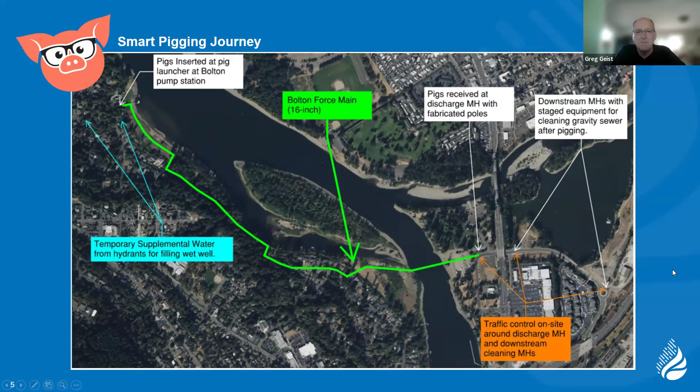Next slide, I think. So Greg, how long did it take for that pig to get from one end to the other? That's a great question. I don't know. Jeff, do you know? It's about 5 minutes is how long it took to go from one end to the other on each pig run.

One thing I'll note, and Greg might touch on it, but I haven't seen these slides, the reason we were doing this was, this is a line that we have had a couple of failures in over the last 7 years. And so in addition to cleaning, we sent a specialized pig down, which is a smart pig. And Greg, you might have a picture of that.

Yeah, I'll get to that. Yep, go for it. All right. Stealing your thunder. I'll step back. That's fine, go for it.

And what we found is that after we installed those pumps, we weren't getting the performance out of the pump station that we expected based on the analysis of what the pump should be able to pump. And so that was part of the reason why we went ahead and did the pigging. And it was very successful. We were nervous about it.

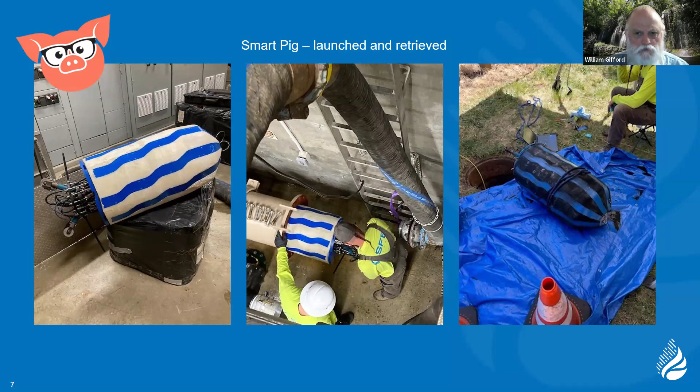Yeah. William, you had your hand up, I saw. Yeah, thank you. So it goes in white with blue stripes and comes out black and blue? Yep. In the pipe? It's scouring the sidewalls of the pipe, and so you can imagine after 40 years, even after a number of pigs have gone through it, it's not clean. It's not a steam clean. It's more removing debris and other things that might have settled.

Some of that's caused by velocities in the pipe and low flow during the summer. When they're slower, you get buildup or deposition in the pipe. So even after a number of pigs had gone through, that's what it comes out looking like. How many pigs went through?

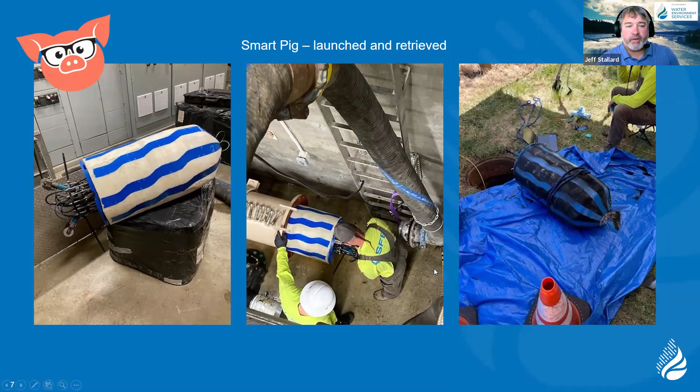There was a series of 8 pigs that went through. As Greg mentioned, they're smaller and softer to start with, so you want to make sure that when they come out the other end, they're not torn up and beat up or getting hung up. Then you gradually make them stiffer and bigger to scour better. So it's a real systematic approach. That's cool technology.

Why is it called a pig?

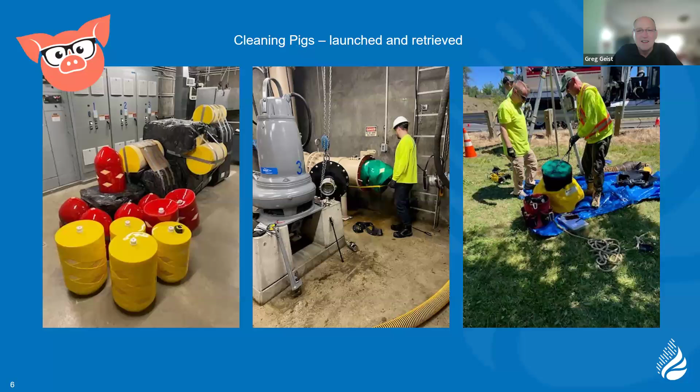Our engineering staff did some research, and apparently when this technology was first developed, the pigs were straw balls wrapped in barbed wire. When they went through the pipe, the scraping of the barbed wire along the metal sounded like the squeal of a pig. Hence the name pig.

That's funny, yeah, I thought that was great. Looks like I have a question, Greg or Jeff.

Just not to get too graphic, but I'm curious how dirty those pipes were. Can you describe the volume of stuff that came out the other end, or describe how much actually got cleaned up from the pipe?

TMI, unfortunately I wasn't there to witness it. We had a Vactor truck there to suck it up, but there was debris, though it was not as odorous as anticipated. We were concerned because we were capturing these pigs right outside Clackamas Park, which gave us some worries about odors, especially in the summer months when it's heavily used. We did not, that I'm aware of, receive any complaints on odors, but it definitely comes out as a black sludgy material, though it wasn't as odorous as anticipated.

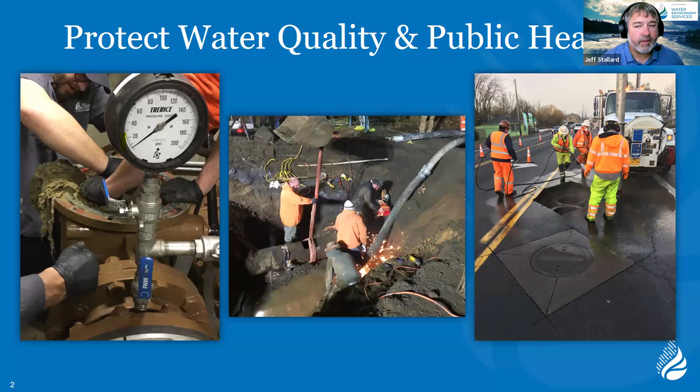But before I dive into those details, I always like to remind folks why WES is important. I love the outdoors, and I like to protect our outdoor spaces, and that's kind of why I got into this business. I just want to acknowledge the efforts of the people on this committee who give their time to making sure that we're doing the right thing and protecting the environment, our water quality, and public health. Thank you for being a part of our committee. Next slide.

So we'll give a little background on the capital improvement plan development, project updates, some next steps, and some questions. This is kind of the outline I have. Next slide.

So while we're here tonight to discuss and give an update on the current CIP that we have adopted, I want to take a moment and recognize that this is just one of our four critical strategies that are critical to supporting our mission and vision: the strategic plan, our fiscal year budget, our long-range financial plan, and our capital plan, which is what we're here to talk about tonight.

As the capital manager, of course, I like to think of the CIP as the most important document we put together, but that's not the case - the reality is much different. I think all of these strategies are equally important and are really the core documents that inform our decision making and set the platform for us to make data-driven decisions and not emotional decisions. We try to really use data and facts to inform our decisions on timing, how we can pay for things, and what is our strategy and our core values. So all of these are intertwined together.

So just want to point out that while we're here to talk about the CIP, we have these other documents that are influencing this plan.

Next slide. And so while I mentioned these core strategies that are impacting our plan, we also have the plans that make up the capital plan, which include the Hoodland Master Plan, which really looked at the collection system and the plant there from a condition-related standpoint; our sanitary system master plan, which was completed in 2019; the boring facilities plan; the Willamette facilities plan; and our storm system master plan, which was the most recent plan.

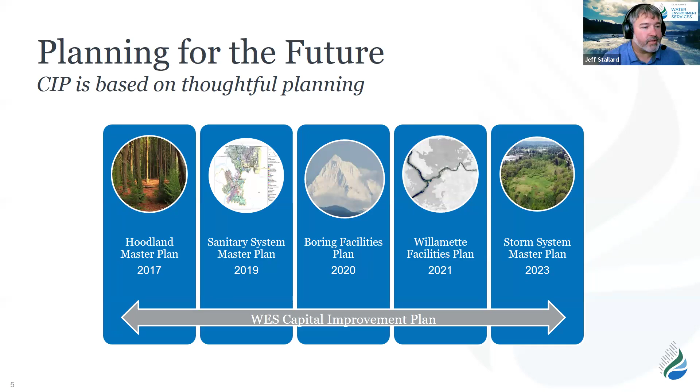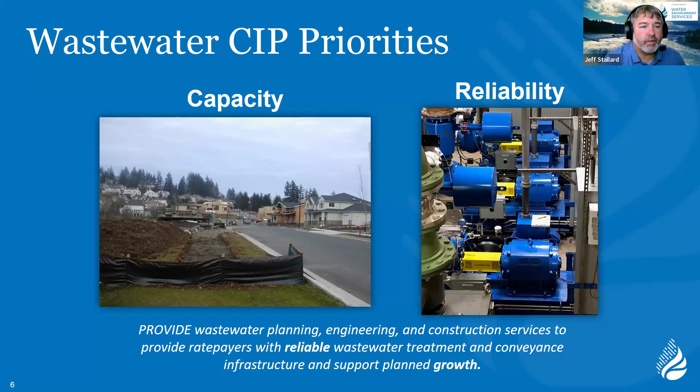Next slide. So as we develop our CIP, which is based on all the planning documents, there's really two main categories that drive a majority of the projects in our plans. The first is ensuring the capacity of the system, that's treatment and collection, making sure that capacity is adequate to support the anticipated growth of our community, be it residential, commercial, industrial. We want to make sure that we can accommodate that growth. The second is to ensure that the infrastructure we own continues to be available to be operated by our amazing O&M staff. Pumps and other things have useful lives associated with them, so we want to make sure that we maintain those systems and replace them when they're at the end of their useful life. So two main categories we look at are capacity and reliability.

Next slide. So here's kind of when we look at those, our projects in our CIP, just on a percentage basis, we have, as I mentioned, the reliability and the capacity. And as you'll see here, our reliability component is a much larger percentage. It's almost a 60-40 split, with a sliver of regulatory in there.

I want to take a moment and highlight this regulatory component. As you can see, we have a pretty small amount that we allocate or anticipate for regulatory. But if we get a different permit limit than we're anticipating—and all of our facility planning, as Greg mentioned, is really focused on both Kellogg and Tri-City—there are some unknowns in there. If a limit comes down, that could change our planning documents significantly.

So we are in the process of working with DEQ on our Willamette facility plan and getting their buy-off on our path forward. I just want to let this group know that that's not finalized or set in stone, and those conversations are ongoing even to this day. We will obviously get DEQ concurrence before we'd kick a project off, to make sure we're doing what we're allowed to do. But there is a piece where we're not seeing or forecasting significant regulatory changes at this time coming down the pipeline in the Willamette River Basin.

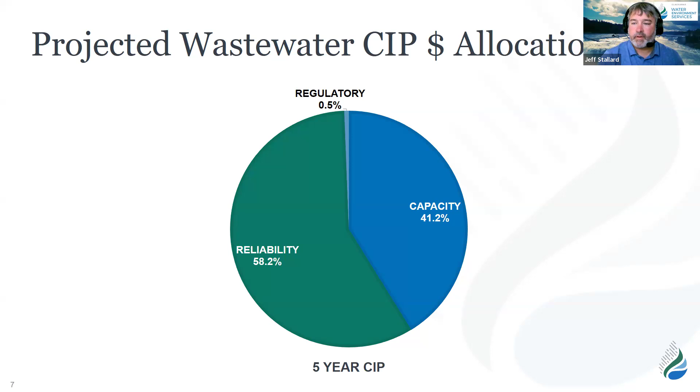Next slide. So how are we doing delivering the plan? If you recall, one thing I want to note was a big change this year: historically we had developed a budget and then created a CIP after that. Last year, we reversed that order—we built our CIP, which then fed into our budget, which was so much nicer, I'll say it that way. It was a lot easier to build the budget when you already know what you have to build.

As you can see, we've been a very busy group. Our capital plan had identified 17 projects, and we're currently working on all 17 of them. We had a budget of $49.7 million this year, and I'm anticipating spending roughly $41 million of that, or about 82% of budget versus actual. I want to step back and comment on how one project can really significantly swing that number, and how the timing of construction can have a really big impact on that.

The project I'll highlight is the Tri-City Outfall project. It's the biggest dollar project we have in our plan at $60 million of construction dollars. Our Clack-a-Mole tunnel machine was delayed by about a month getting to our site. Our monthly spend this summer, when we'll be doing open cut construction and tunneling, will be roughly $8 to $10 million a month on the outfall, for about 4 months. So you can see a one-month delay on that project could have a really significant impact on our budget versus actuals—and we are delayed a month on that project. I think we might have gotten even closer to our target had things gone as we thought they might, but things are out of our control. I just want to highlight that one project getting delayed can have a big impact on that.

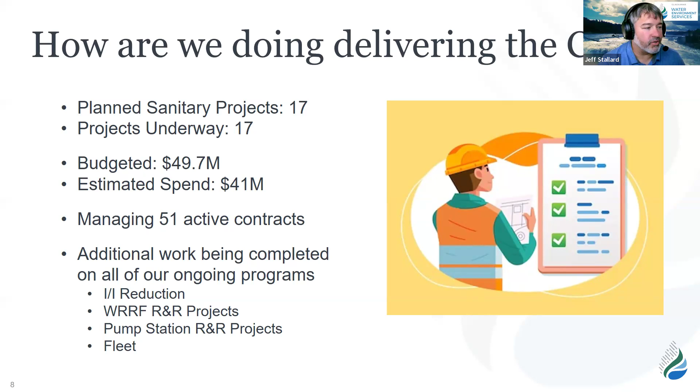We're managing 51 contracts, which are contracts in all phases of project delivery, be it a consulting contract, a contract with a contractor, or a contract with a consultant doing planning work for us. That's a significant workload for our work group. I'll note that while the focus of the CIP is the major projects, there are many annual programs that take a lot of time and energy to manage, like the I&I reduction program, the renewal and replacement program, and our fleet. So in addition to these capital projects, we have all these smaller ones as well.

Staffing updates. As Greg mentioned before, we are full. We have a full engineering staff now, and our last position was filled July 1st. Josh Miner came on board, as Greg mentioned. I want to thank this group for supporting the recommendation to add 2 new engineering staff to our group. That was approved by the board, and we were able to get it. He couldn't start until July 1st, but he would have been on board before the end of the fiscal year if we could have had him earlier. That brings our total staff in the capital group to 8 engineers and 1 construction coordinator.

As Greg mentioned, our newest hire, Josh, is really there to help us on the construction side of things. As we started to dig into how many projects we could do at any one time, there becomes a limit to what you can tear up in your system at once. We're paying consultants a lot of money to do inspection work because we don't have the staffing to have folks out there full time. So we're having that engineer focus on being a construction manager for us, which will allow us to not have contracts with consultants, a much more expensive way to deliver that. It's a goal of ours to build that in-house resource, and then you retain that knowledge in-house, which is beneficial for the long term of our organization.

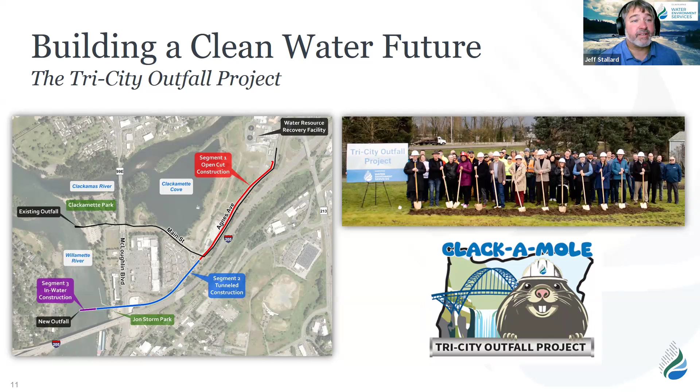The Tri-City Influent Pump Station was original to the plant, 1985 construction. This pump station receives all the raw wastewater from the collection system and lifts the flow up to the treatment processes, where it is allowed to flow by gravity all the way through our treatment systems and out to the river.

The facility plan identified both a need for condition upgrades as well as an expansion required for the pumping capacity to accommodate the anticipated growth in the service area. This station needs to handle all ranges of flows. Flows that we receive overnight in dry weather are much different than when a storm comes through, so it's got to accommodate a large range of flow.

At this point, we're underway. We're at conceptual design, and I'll note that when we talk about the planning, the current firm capacity of this station is 50.8 million gallons a day.

For those of you not familiar with what firm capacity means, basically when we rate a pump station, we rate it based on having the largest pump out of service. We assume we're going to lose the largest pump in the worst of times, and we design our system to accommodate that.

So we currently have a firm capacity of 50.8 million gallons, and the upgraded station will have a firm capacity of 72.3 — a pretty big increase. I will note that the total capacity of the existing system is 68.4.

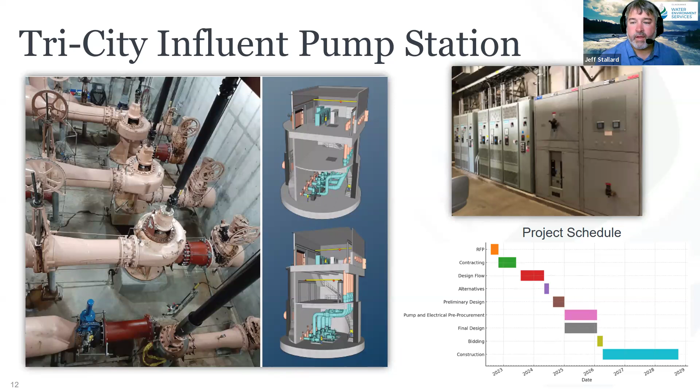Tri-City Primary Clarifier Project. We've got some new folks, so I'll take a moment to outline the purpose of the primary clarifier. This goes from the IPS, through our headworks, which is physical screening, and then into our primary clarifiers. It's the final physical treatment process that removes solids before we go into biological treatment at the plant.

Wastewater enters the clarifier tanks, and floatable solids — fats, oils, greases, or scum — are removed from the surface. You can see the chains that go across; they scrape the bottom one direction and the top the other direction. We bring our scum down one way and pull our settled solids down the other. Settleable solids are the sludge, so we remove scum and sludge.

Effluent destined for biological treatment leaves the clarifier over a weir, and the expected range for percent removal in the primary clarifier is roughly 90 to 95% of the settleable solids. So we really slow the flow down and give it time to settle out.

All of the original equipment has been in service since 1986 when the plant was brought online. This project consists of replacing all the mechanical equipment and repairing the concrete surfaces, which is what you're seeing here. On the left, where those guys are spreading concrete, you see it's really aggregate kind of under their knees.

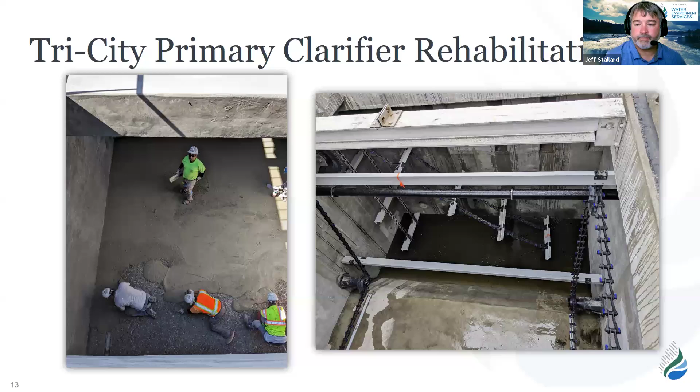But this could allow us to delay the building of our future digester, which is planned in 2040 now. So it's a ways off, but this could allow us to delay that even longer because it really gave us extra capacity in our digesters. Next slide.

Kellogg Creek Influent Pump Station. We completed this project and all the pumps are in operation during this past winter. I want to highlight the type of pumps. These gray pumps, most pictures of the pumps in our stations, you're going to see these gray pumps. Greg, I think, commented on it at Bolton. They had these new gray pumps.

We, as an organization, about 4 years ago, standardized on Flygt N impeller pumps. I don't want to call them the Cadillac because they're not super expensive or anything like that, but from a performance perspective, they perform amazingly in raw sewage situations. We put one in at our Willamette pump station, which is a station that was constantly having ragging issues, and that one pump didn't have any ragging issues while the other ones regularly still had ragging issues.

And so we standardize on these pumps, and these are the type of pumps we're putting in at all of our stations. That's a big deal because it limits the number of spare parts we need to have on hand. A lot of those are interchangeable, and also training our O&M staff for operating and maintaining these pumps becomes simplified when you're only talking about one style of pump. So that's a big deal, but that station's up and running and that project's complete.

What are those pumps called? Flygt, F-L-Y-G-T, and they're the N impeller. It's a specific impeller type that's designed to pass big solids. I think depending on the size of the pump, some of those pumps can pass 6-inch solids without an issue.

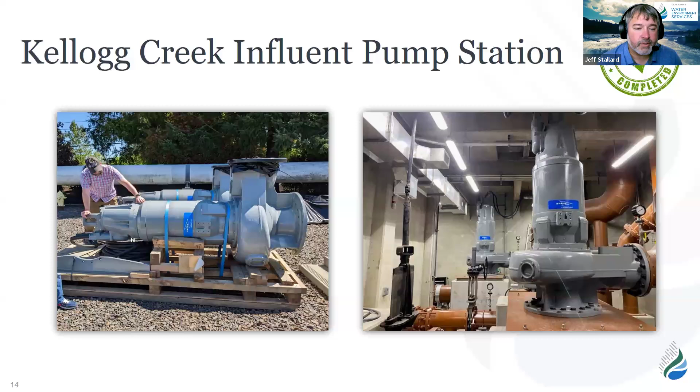Thank you. And they kind of have a cutting head on them, William. So as you get these rags that develop in our system, and we continue to tell people don't flush wipes, things aren't flushable, they continue to flush them anyway. And these pumps do an amazing job of getting those conveyed through our system. Next slide.

Our Kellogg Creek Aeration Basin Improvements Project. As you might recall from last year, the aeration basins really are the heartbeat of the liquids treatment process at the facility. Air is supplied in these basins to the bugs that we're using to remove our organic pollutants. The control of oxygen in these basins is critical. Get just the right amount of DO, you grow just the right amount of the right type of bugs you want. If you're off, you start to grow different bugs that can impact your sludge's consistency and settleability.

The main focus on this project was to overhaul the system to increase control. Our blowers are the most expensive piece of equipment we operate, and so if we can dial in and optimize the operation of those pieces of equipment, we can save money. This project was completed this fiscal year and is in operation. And as I mentioned, we're anticipating saving around 134,000 kilowatt hours a year on just these control optimization and piping upgrades.

And we were able to get an Energy Trust incentive for this work due to the energy savings for about $50,000. So Energy Trust subsidized our project $50,000 because we're able to save power, and we're taking that initiative. So a very successful project, and we continue to refine and optimize the controls for these as we work through the different operating seasons. But it's been a success so far. Next project.

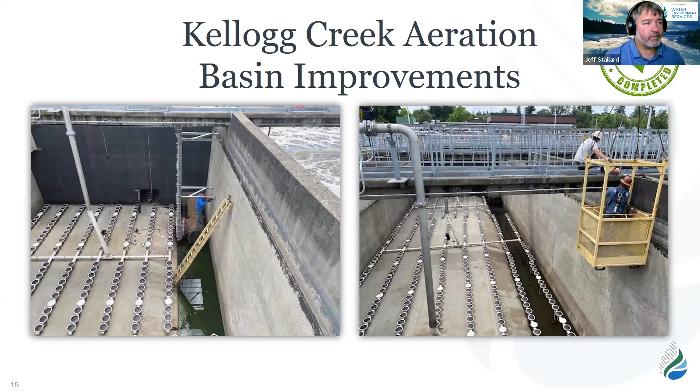Kellogg Creek Secondary Clarifier Rehab. This project was completed over 2 summer seasons. We did two clarifiers at Kellogg. We did one summer and the second the next summer. This project consisted of new drives, so it's the new motor drive to drive the mechanism. We re-leveled the mechanisms and the weirs associated.

We, as you can see, tore off the slab on the bottom, which is basically a surface slab, so it gives your mechanism a nice smooth surface to ride on. So you match those two up, so you get really good scraping action on the bottom, essentially. We repaired some concrete in other areas of the basins as well. And we put a new coating on the existing mechanism.

So we shouldn't have to revisit these for another 20 plus years. It was a big success to do over 2 years. And we've actually noticed a little bit with the leveling of the weirs, we're able to more confidently pass higher flows through the Kellogg plant in a more comfortable manner. Ops is less stressed when we get up to higher flows because these basins are really performing a lot better than they were before.

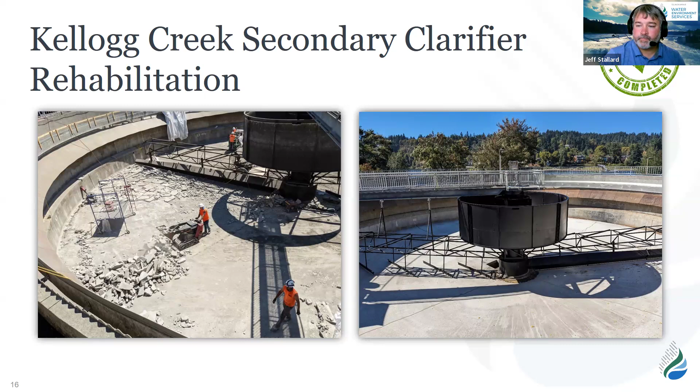It's full of windows, and I guess everybody likes to work in a place that's comfortable and feels happy and warm and inviting. And so I think this will make our facilities more appealing for folks to want to be there and also want to work there. The locker room overhaul, a lot of improvements. I'll give an example. We have a converted janitorial closet currently as a shower in our facilities just because they just haven't been updated in time. So it'll be a really nice facility when we're done.

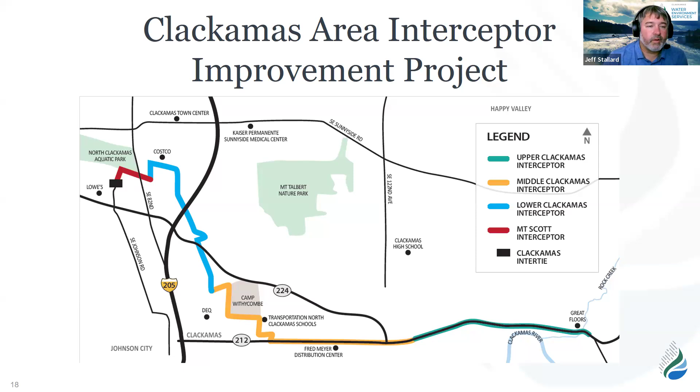Next slide. This is a new project, and if you recall, last year we moved this project up a year. We were not originally going to get started on it until fiscal year 24-25. Instead, we started during fiscal year 23-24. We are out there now getting our planning and our field work done. We're working on geotechnical explorations along the alignments.

As you can see, we've spent spring, summer. By this winter, we'll have a conceptual design to go through, and we'll be transitioning into 60%, property acquisition, permitting, and then onto construction, with construction to be wrapped up in 2027.

This extension has really two features. One is the east extension of the Rock Creek Interceptor along Troge Road. That'll go out to Foster, and the other is the north extension that goes all the way up to the Clackamas County, Multnomah County border, essentially. So it's a relatively large project. There's rock and some very deep sewers there. It's not a perfectly flat piece of property along the alignment.

This initial conceptual phase we're in right now will take the planning level routing that was completed as part of the initial project that built the first phase of Rock Creek. We'll make sure to refine that, looking at property acquisition. Do we have people that are willing and wanting to give us easements across their land? Those are the types of things that we'll be evaluating as we finalize that specific alignment. The corridor is going to stay. It's just a matter of which particular properties would be going through as part of this project.

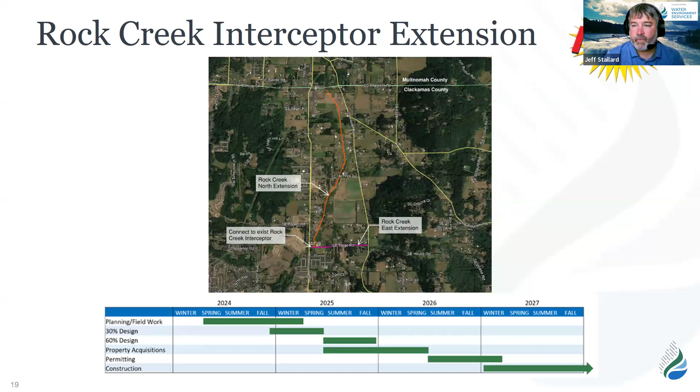The IT2 force main I mentioned before, the Clackamas Interceptor, brings flow down to the station. If it doesn't come to the station, it goes by gravity onto Kellogg. So this station is really our opportunity to pull flows out of the interceptor to send them to IT2.

We are currently out to bid on the force main piece, those segments A through F. That's the pipeline pieces. We're expecting bids to come back next Thursday, so I'll have a real good feel on costs for this portion of the project. We are also working at 90% design on the pump station improvements.

On these pump station and force main projects, it's really two different types of construction: one's linear along streets, and one's really mechanical, process mechanical, at a pump station. We traditionally separate those into two different contracts for two different contractors, and we manage them that way. There's a lot of interplay between those two.

The big part of this project that isn't really infrastructure related is the controls. As you can imagine, the controls are very complex, and we're getting ready to make them more complex by adding this 30-inch force main. Now we'll have a 20 we can send flow through, a 30 we can send flow through, and we can let it go to Kellogg. There's a delay in the controls on what you let pass the pump station, so we've built a dynamic controls model we can play with to dial in exactly where our flows are going to go and build in that delay time to understand how it's going to impact our facilities.

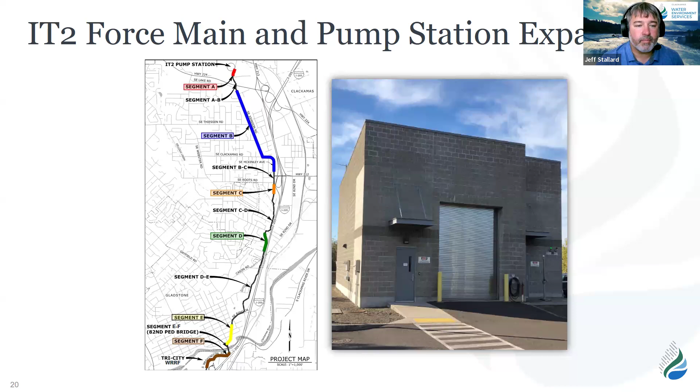The Willamette Interceptor project is ongoing, and it consists of essentially 3 separate projects: the I-205 bridge crossing, being constructed by the ODOT contractor; the new Willamette pump station, which will be a brand new pump station, not an overhaul of the existing one, which we'll be decommissioning; and the new Willamette force main. As with pump stations and force mains generally, we build those with two separate contractors because they're really two different skills. We just completed conceptual design of the pump station and force main this year, and we're moving towards 30% on that design.

I do want to note that even though we're not anticipating construction to begin on this project until 2026, we've had a couple of meetings now with the West Linn Engineering Group to talk about this project. We're very aware that construction along Willamette Falls Drive is not going to be fun for anybody. It's going to be very challenging to build and very impactful to the community. This will especially be true pending the outcome of tolling, which everybody's familiar with in our area, but ODOT anticipated that traffic along the Willamette Falls corridor could potentially double if tolling's instituted, which would kind of double down the impacts of our construction. So we've started early communications with West Linn, as we try to do on all our projects, to get out early and make sure everybody's informed. We haven't done a lot of public outreach to the general public yet, but we have been in conversations with the technical staff at West Linn about this project coming, and working with them on the impacts in those areas.

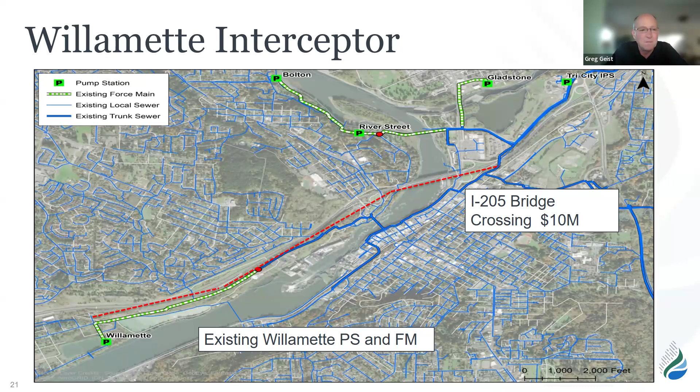Next slide. We're getting down to the end here.

Multi-pump stations project. This was really a program we've been working on for a number of years. As you can see from the list, when we embarked on upgrading our pump stations, it started off as a couple, and we realized with the sanitary sewer master plan, many more upgrades were required than what we originally planned for. So we decided to go ahead and have one consultant and one approach to upgrade all of them for consistency.

That helps our operations staff see controls being all the same, equipment being very similar, and layouts and those types of things. We are under construction this summer at our Gladstone facility. We've completed 4 of our pump stations, and we're out to bid on the ones up at the mountain and some small improvements at Sieben Lane, Carver, and Mitchell Creek. We expect to get bids back this week.

Today, actually, I didn't hear the results on the 82nd Drive pump station, and the next package isn't advertised yet, but it's over to procurement to be advertised in the near future. This work will all be done next summer - a majority of it just on lead times - but when we're done, we will have touched a high percentage of our pump stations.

As I mentioned previously, we standardize on Flygt pumps - those are the types of pumps being installed at all of these stations, you can see the picture there. Again, this is really to give us consistent controls and address deficiencies and aging infrastructure. Not a lot of capacity increases for these smaller pump stations, some minimal capacity increases, but a lot of condition improvements.

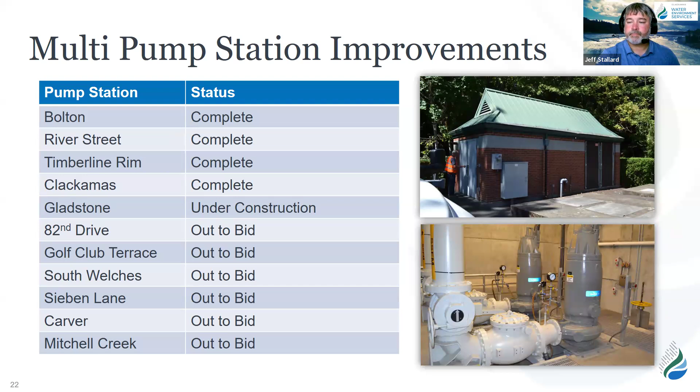Our shared collection system, the inflow and infiltration part of it - just highlighting our regional approach. Fiscal year to date, we've spent about $550,000 to our member communities on I&I related projects in those 19 basins identified in our sanitary sewer master plan. We have 3 active projects being done right now, and 11 total approved projects, with the anticipation this is about an $8 million investment we're going to make in fiscal year 24-25. So this is no small investment we're making in our collection system and I&I, across not only our facilities that WES owns and operates, but our member communities as well.

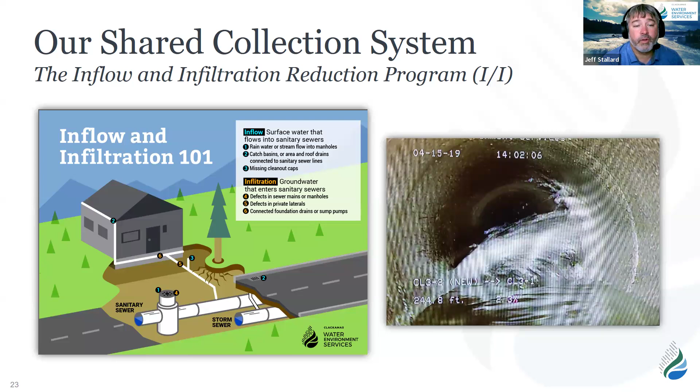Next slide, I'll give you a real world example of the things we find and the things we do. Our collection system master plan used data from 2015. Our most recent analysis of I&I rates used data collected between 2017 and 2022. We really embarked on expanding our flow metering approach and collecting good data.

What we found is we are making progress in our Mount Talbert Basin. I'll highlight one of the projects we did and found during our analysis. We did smoke testing and found a detention basin that was smoking - really weird. When we went and looked, this is a Kaiser facility that was built with an abandoned lateral that was never plugged. Literally, their entire parking area drained to this stormwater facility, which was an infiltration basin. It wasn't infiltrating - it was going right into our abandoned service lateral and coming right into our collection system.

And so those are the types of things that we find when we're out doing smoke testing. Also, to paint the picture, you can imagine how big of an impact this had to our I&I in this basin. Just pulling that one line off has a pretty big impact. From a cost perspective, our field op staff went out, uncovered the abandoned lateral and plugged it. Not all I&I projects are expensive or take a lot of time. This was a really quick fix, and it's shown to have a pretty immediate impact on the flow we have coming from this basin. So we hate to find them, but we also like to find them because it's a really quick, easy solution.

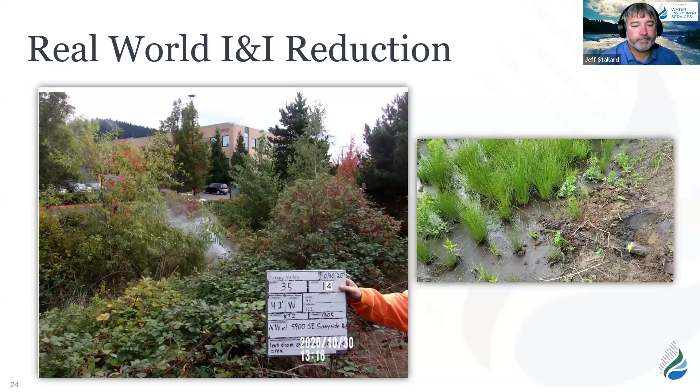Next slide. So our renewal projects - just want to highlight that we use condition assessment information to prioritize and plan our smaller projects. This is small equipment replacement that isn't included in a larger project. During this year, we replaced a number of flow meters throughout our plant, and we're working as part of this program to rebuild the cogen engine at the Kellogg treatment plant, which had a catastrophic valve failure. That's offline currently. We're working through rehabbing that.

It's this budget, it's a program. We have $800,000 a year in this. We program a number of it to asset management identified things, but we also keep some of that money available for these surprise projects that come up through the course of the year. Surprise opportunities, however you want to look at it - things that are unplanned.

And things fail. No matter how good your preventative maintenance is, things fail. They have a useful life. And so these are the things.

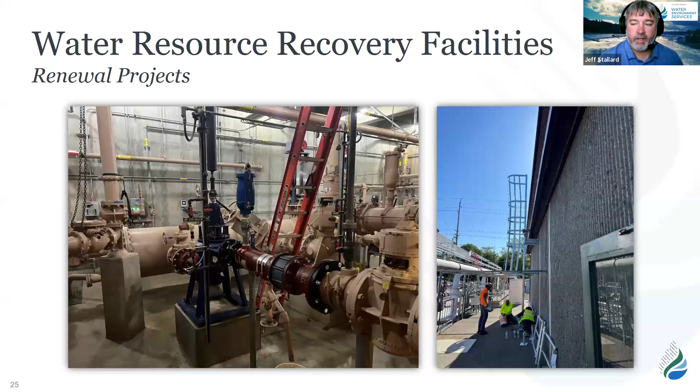Next slide - I see Greg looking at the clock, I'm going to go quick. So we've embarked on a struvite project. I mentioned last year we have struvite buildup in our centrate pipe, and centrate is the water or the fluid that's pulled out of our sludge when we send it through dewatering.

It's highly nutrient, and so it actually precipitates on our pipe. That's PVC pipe there on the left, that crystally, sandy looking material. It forms on the sides of the pipe and restricts flow. In an effort to stop that, we have about 1,500 feet of pipe that's getting clogged pretty regularly. Our guys are spending a lot of time maintaining it. We're looking at the use of ferric chloride and doing a pilot study. It's one of those opportunities where, now that we have a full engineering staff, we can really support looking at not only the low hanging fruit, but also, here's an issue - how can we solve it? It's a testament to working collaboratively with operations and trying to solve real problems beyond capacity and reliability. It's how can we optimize our systems to perform properly.

Get some little pigs, yeah. That is about 2 months of buildup, so you can imagine how often we're coming through and cleaning those pipes. It's a pretty aggressive struvite problem we have that we're working on.

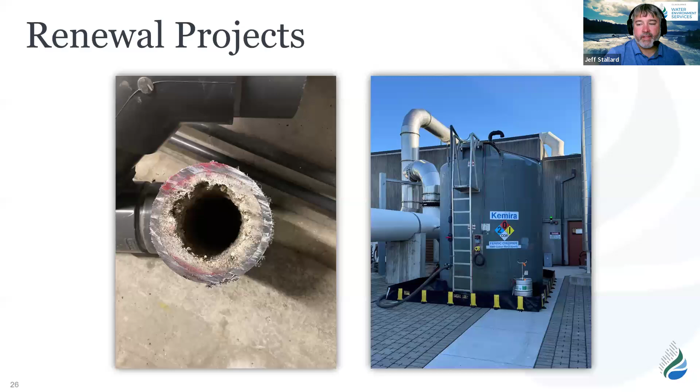And then last, I'm going to end with a surface water project, the Three Creeks project. I was really heavily focused on sanitary, but I want to mention this super exciting project in our surface water - the Three Creeks Natural Area Floodplain Enhancement Project. We all got an opportunity to tour it this past fall in September. It's an 80-acre area, and the goal of the project is to improve water quality, reduce downstream flooding, and improve the habitat.

Restoration of the Mount Scott Creek will include adding some stream bed material and logs to reconnect the creek to the floodplain. We're currently continuing design on this project and finalizing scope and scale as we understand the finances we have with the grants we get and other things like that.

The thing I'm excited about beyond that is it's a fantastic resource we're going to have for educational groups like the Clackamas Community College Environmental Learning Center, Trackers Earth of Portland, where I send my kids to summer camps, and other things like that. Again, it's that kind of living and enjoying where you live, and we're very fortunate here.

And I'm done. Questions? All right, so we have exceeded our time.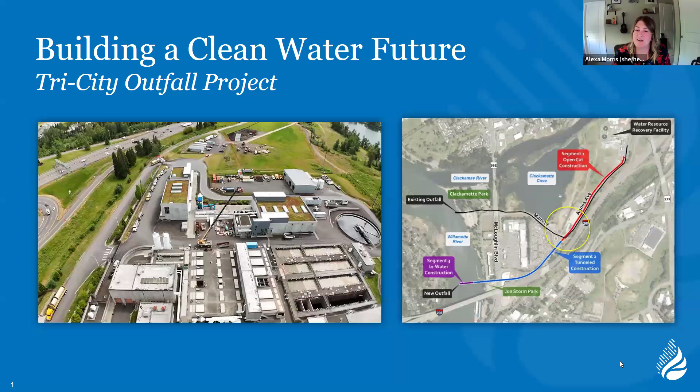This is where the Clackamole will start its adventure. So the Clackamole is coming, and as Jeff said, it is on its way. And that means an open house is also coming soon. As soon as we know when the Clackamole will be landing in Oregon City, a date will be set for an open house, and this will be a community event to meet the Clackamole in person. You're invited, or your communities are invited, friends and family, to come see the Clackamole before it begins its journey, and you'll have a chance to take your photo with the Clackamole.

We're also going to have kids activities because it'll be August, it's summertime, so we'll have some coloring sheets of the infamous Clackamole. And this will also be an opportunity to rock your Clackamole t-shirt, which you may have heard from Chris asking for your t-shirt size. So if you haven't submitted that yet and you're interested in a Clackamole t-shirt, please send Chris your t-shirt size so we can hook you up with a shirt.

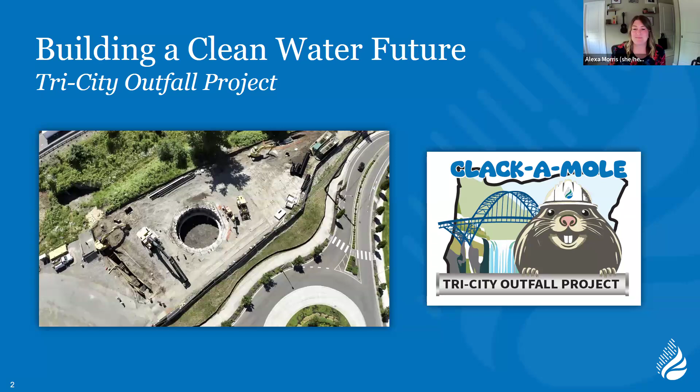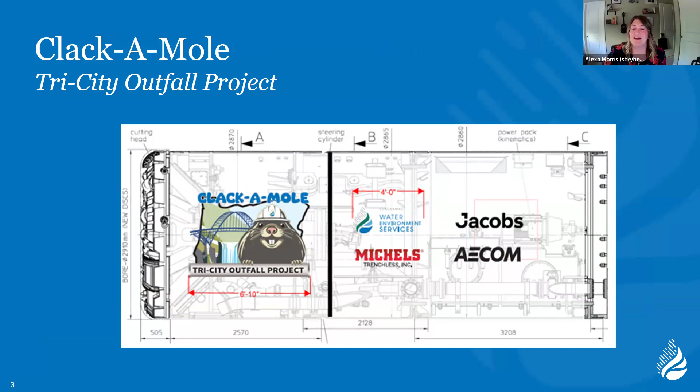And then we're going to jump to the last slide here. Here is a mock-up of the logo on the tunnel boring machine, the Clackamole. So as part of the open house, you'll have the chance to take your photo with the Clackamole. And that's all for now on the Clackamole front. There's more coming soon as we are eagerly awaiting the arrival.

I also just wanted to mention WES is supporting community events going on throughout the summer in our communities. Our vision at WES is to be a collaborative partner in building a clean water future for all. So what does that look like? Well, it looks like movies in the park, like Greg mentioned, and having PSAs about what not to flush. It also includes us hosting a concert during Porch Fest. So in Milwaukie, as a part of Porch Fest, we'll be hosting a marimba band at Kellogg Creek Park on Friday, July 19th. Save the date, that'll be 6:30 to 8:30, so we hope you'll come by.

And then also this month in Oregon City on Saturday, July 27th, you can find WES at a booth at the First City Celebration hosted by the Downtown Oregon City Association. So we'll be out and about this summer, especially this month. I hope you'll come find us.